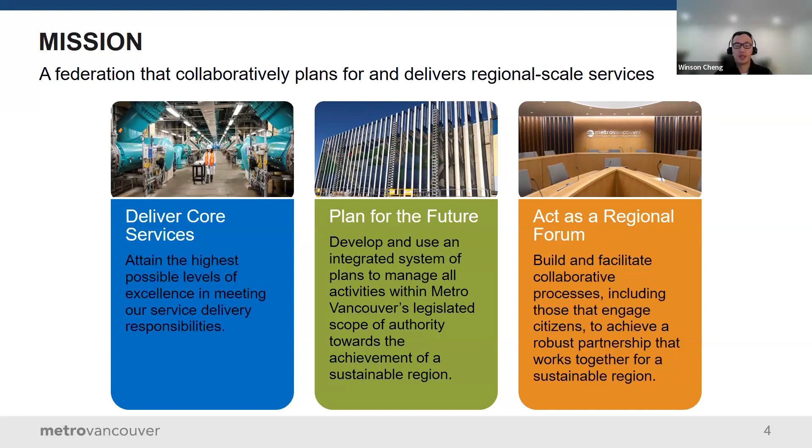Metro Vancouver as an organization provides regional scale utility services in drinking water, wastewater, solid waste, and also housing functions. We also act as a regional forum for building collaboration and finding opportunities to advance livability in the region. And we also plan for the future, including some of the climate action activities that we'll touch upon here today.

On the topic of wastewater, how it works here in the Vancouver area essentially is we have over 500 kilometers of trunk sewers. Our sewer system is mainly gravity fed, and we operate 5 wastewater treatment plants that discharge into what we call the Fraser River, eventually into Strait of Georgia, and then into the Pacific Ocean.

We're regulated by the province of British Columbia and the Canadian federal government on effluent quality. And we're continuously trying to find opportunities to leverage our wastewater system to help some of our climate action goals, including sewer heat recovery, reclaimed water, and renewable natural gas, or RNG, like we call it up here.

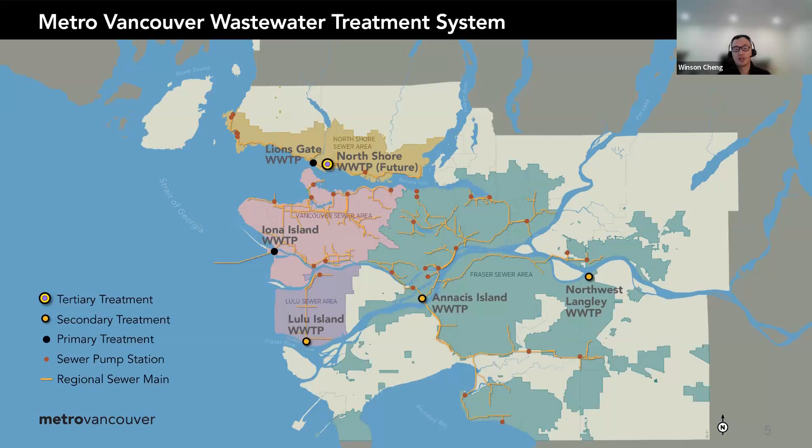And so just to add, in terms of drinking water, we operate 3 dams in the mountains here that kind of service all the municipalities that form the Greater Vancouver area.

So on sewer heat, our drivers for waste heat recovery are guided by several policy plans. Liquid waste plan, where our board has mandated us to use liquid waste as a resource. Our strategic plan, which touches on the same kind of principles, and also Climate 2050 plan, where Metro Vancouver is hoping to reach certain greenhouse gas reduction targets, including carbon neutrality, in the next 25 plus years.

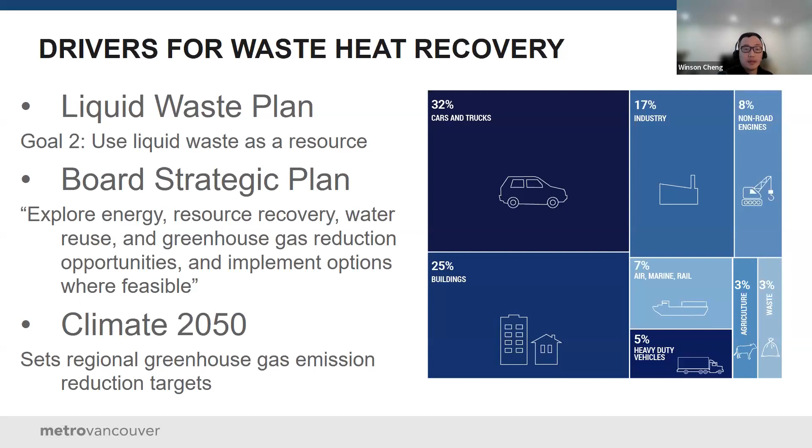So how we started our sewer heat recovery program, it's been over 10 years in the making. We initially hired consultants to look at the available heat in our trunk sewers.

And as you go further back upstream, there's a little bit less heat. When our consultant did that study over a decade ago, they came up with the idea that there's enough heat across our 500 kilometers of sewers to service about 700 high rises.

And so we're currently in the midst of updating this model and making it public on our website via GIS, so that interested external parties can just, as a first glance, look at what's available.

There's a lot of densification, new condos and high rises in town centers in Vancouver, the Greater Vancouver area, especially near rapid transit. A lot of our sewers are actually close to some of these locations, so we're just trying to make the data available to encourage the screening tools that energy companies or our local municipalities can use as they look at district energy options.

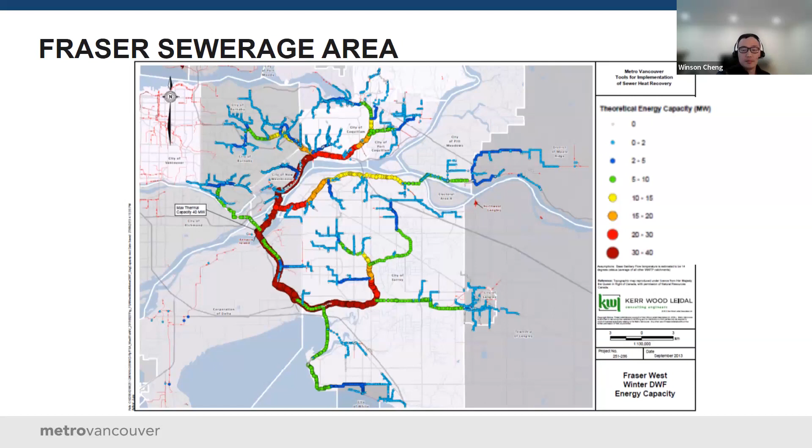And then touching on the temperatures here, in Celsius, it's relatively warm throughout the year, or steady, anywhere between 10 to 20 degrees Celsius in our wastewater treatment plants as the effluent comes through. So we have a relatively reliable amount of energy that we can tap within the collection system.

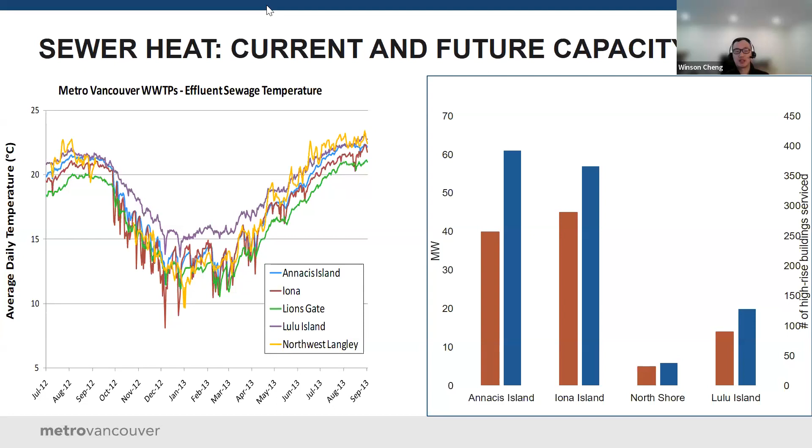Today I'm going to go over how Winson's went over the reasons why we want to do sewer heat recovery. I'm going to talk about how Metro Vancouver is encouraging and facilitating this transition. So we can go to the next slide, Winson.

So our sewage and waste heat recovery policy focuses on these 8 main topics, but the real goal of it is to make clear to potential partners in sewage heat recovery what Metro Vancouver expects from the partner and what Metro Vancouver can provide to the project.

So Metro Vancouver's role as the Greater Vancouver Sewerage and Drainage District is that we operate all these main trunk sewers in the region, and so we have the opportunity to allocate that heat and that resource to potential partners.

From the sewage heat partners, we'd expect them to provide all the infrastructure that can capture that heat. And then the financial conditions would be that Metro Vancouver, as a sewage and drainage district, wants to focus on that as their core business. So any additional operating costs would be the responsibility of the partner.

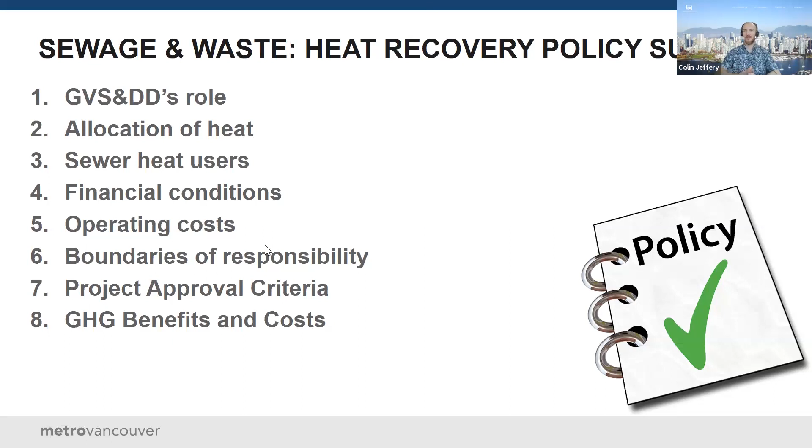Next slide. Looking at the risks, as mentioned, Metro Vancouver is a regional district, and so we are fairly risk averse, both financially and from an operations perspective.

Because our primary purpose is to operate the sewer, we want to ensure that there's no impacts to the collection system and the treatment plants. And so as we engage in these potential projects, we work with the proponent to complete a study that would show what the impact is on the sewage temperature, on flows, and ensure that doesn't impact the treatment plant or the collection system.

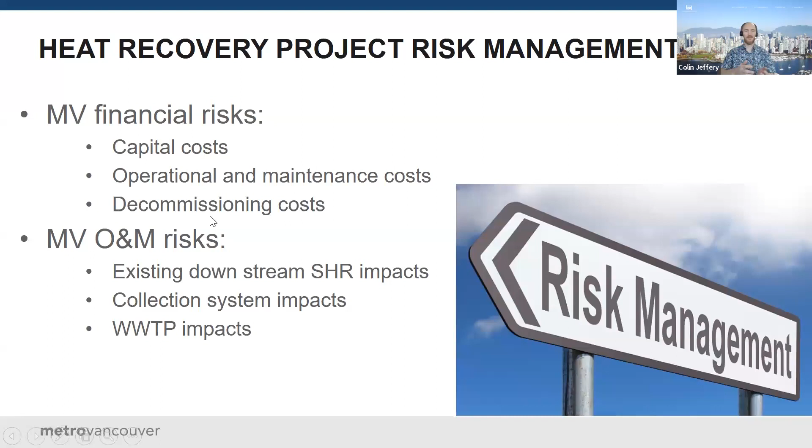From a financial perspective, as mentioned, we don't want to have any ongoing costs. So any operational cost increases to the system, we would pass those on to the proponent. And then also for decommissioning, we expect that at the end of the life of the project, the proponent would disconnect their system.

For the sewage access agreement, this is a new document that we've been working to develop with potential partners. We actually just signed our first agreement for a project in Vancouver. What that agreement outlines is the responsibilities of Metro Vancouver and the proponent, who's responsible for which costs.

As well as one thing we're just getting into is who's responsible for the design and the input that we provide, where the boundaries of responsibility are, how working around Metro Vancouver's sewers, we have a proximal works agreement, so just making sure that that's being followed, where the GHG benefits are allocated, where the fees are allocated, and how long the length of term would be.

From Metro Vancouver's perspective, obviously we don't guarantee any sewage. If we had a long-term contract, we'd also have to guarantee that that sewer would remain in place. So we work with the proponent who would obviously want to have a longer contract length to find a balance there that works for everyone.

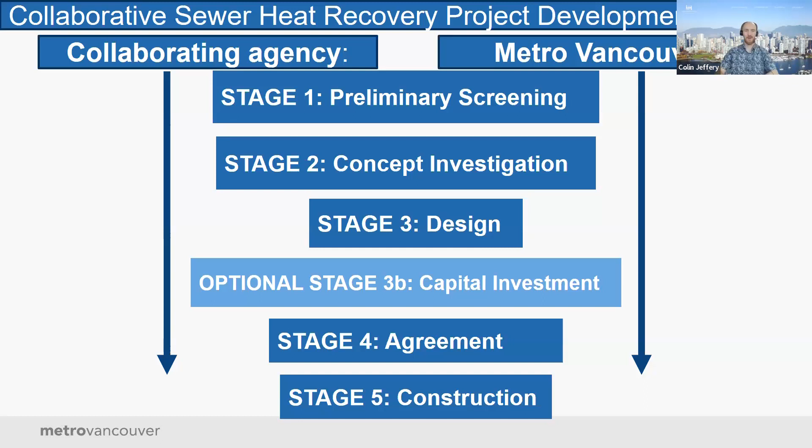Next slide. I want to talk about the collaborative approach we're taking. When a proponent is interested in connecting to our sewer for a sewer heat recovery project, we have this 5-stage process that goes through the preliminary screening, the concept investigation, the design, and then a final agreement and construction. I'm going to go through each of those steps fairly quickly, just to give an idea of what we expect at each stage.

Next slide. The first stage would just be an initial screening study. The proponent is looking at a variety of potentially low carbon energy sources that come to Metro Vancouver and request data. Because as Winson mentioned, we have a sewer heat model that kind of tells us approximately what the sewage flow and temperature is throughout our system. We're able to provide that information on a fairly high level.

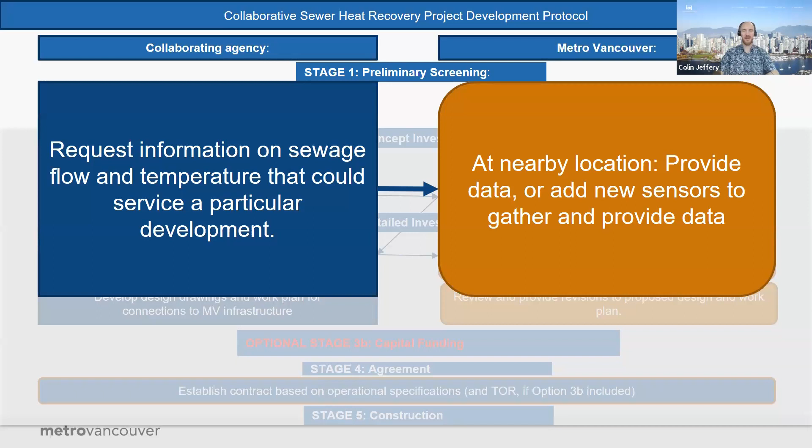Going to the next stage, if the proponent shortlists sewer heat recovery as an option, they can then request that we put in specific monitors at their specific location so that we can get the detailed information at that site. Metro Vancouver would be able to provide them with that information and provide ongoing data to them while they complete their investigation.

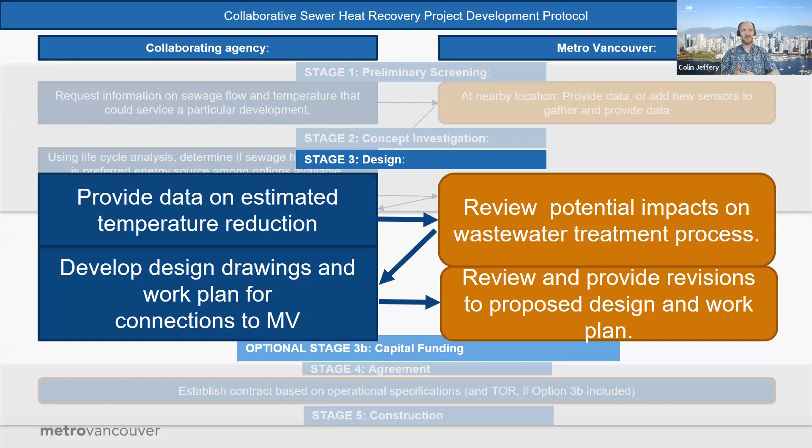In step 3, we're looking at providing a more detailed study on what the impact of the sewer heat recovery facility would be on Metro Van's sewer. So we look at the study on the impacts to the wastewater treatment plant and the collection system would be, and once again, Metro Vancouver would receive that.

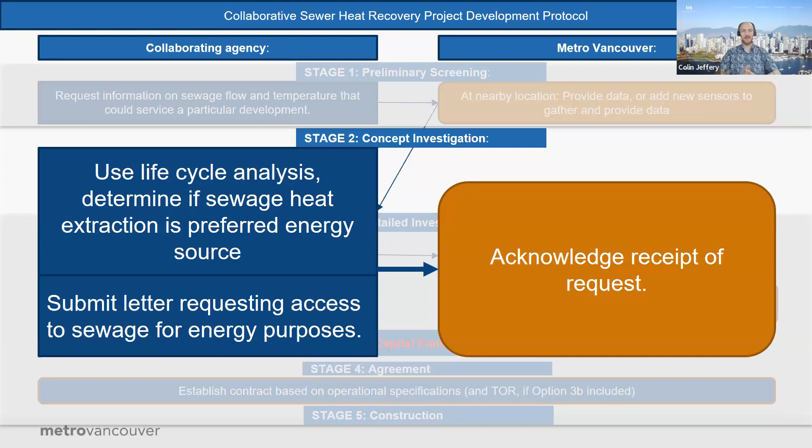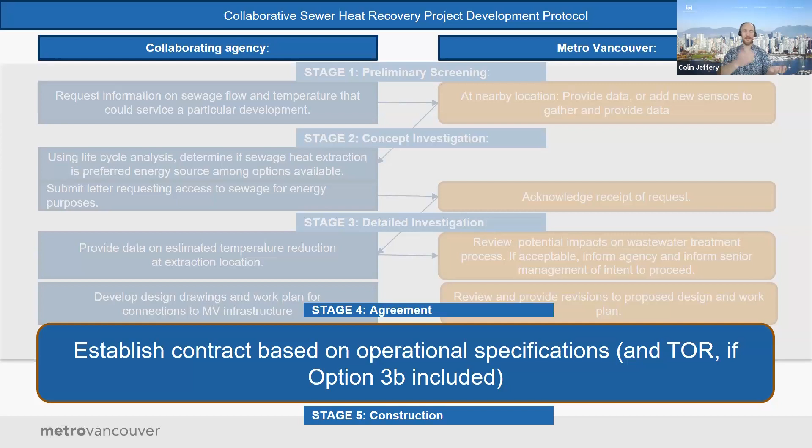The next stage would be establishing an agreement. So if the study determines that this is a preferred option and they're going to start building the system, then we'd establish a contract or a terms of reference based on the specific context of that system. I'll show later that we're working on about 5 of these systems right now, and each system has a unique characteristic based on the flows, the temperatures, whether there's downstream systems, and what those impacts would be. So the contract looks to outline those, and then finally we get into the construction phase where Metro Vancouver is an active partner. We have people on site to monitor our sewer and ensure no impact to operations.

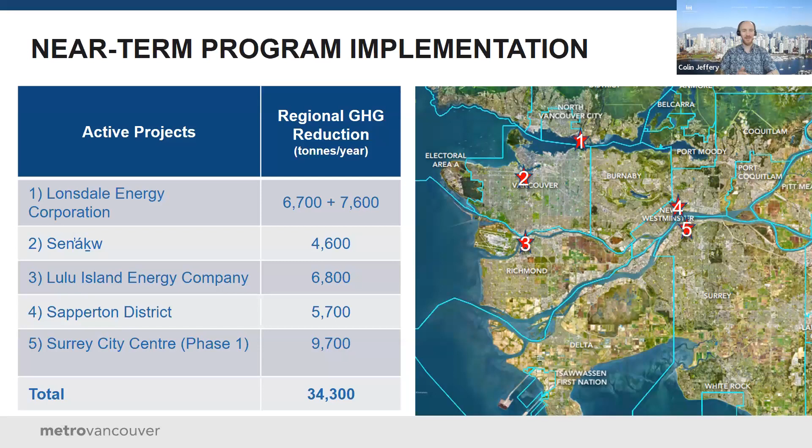As mentioned, we have about 5 projects on the go throughout the Lower Mainland, in North Van, Vancouver, Richmond, Surrey, and New West. We're often getting new requests. So it's an exciting industry to be in, and we're glad to be a supporting partner in this.

Thank you very much. And if there's any questions, I think we'll be happy to answer them.